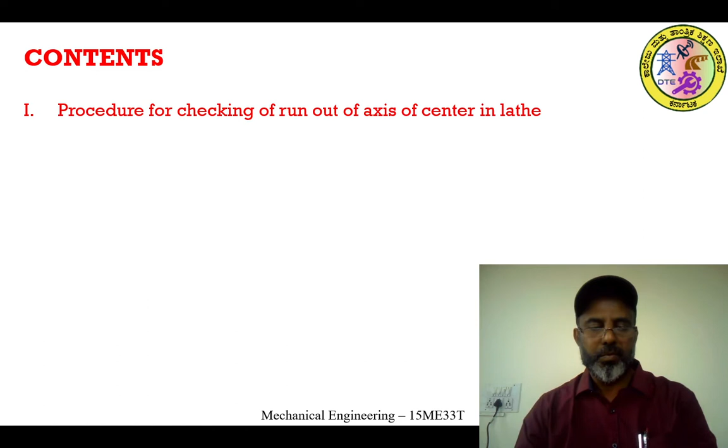This is the third test, in which we are checking the alignment of these two centers. Actually, one center is not there, but you can consider this chuck center as the center of the headstock, and the second center you can consider as this center fitted inside the tailstock.

So this is the test mandrel which you can see here, and the dial gauge indicator is fitted along with the dial gauge indicator stand. This is the magnetic stand fitted on the saddle or carriage. Initially pressure is given to this plunger, so we get the first reading, and we have adjusted the dial scale to 0.

So this 0 value is the initial value, and we will move the carriage towards the right side. While moving the carriage to the right side, this plunger will slide on the test mandrel. So the first reading we can consider as 0 because we have set the bigger pointer exactly on 0.

Next, I will rotate this wheel and move the carriage towards the right side. You can see the motion of the carriage towards the right side. Here you can take the reading. Simply check where the pointer is. It is on the second division from 0, rotated in the clockwise direction.

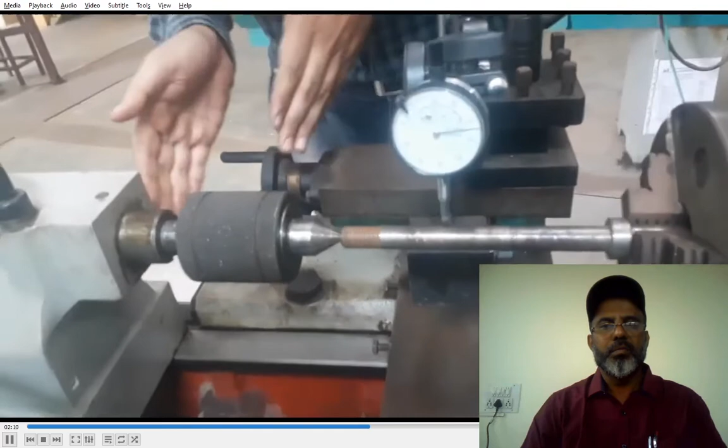Now again we will rotate this wheel and move the carriage towards the right side and take the third reading. In this case you can see again the pointer has rotated in the clockwise direction, and it is at the fourth line from 0. It indicates 4 into 0.01, means plus 0.04 mm. This is the third reading.

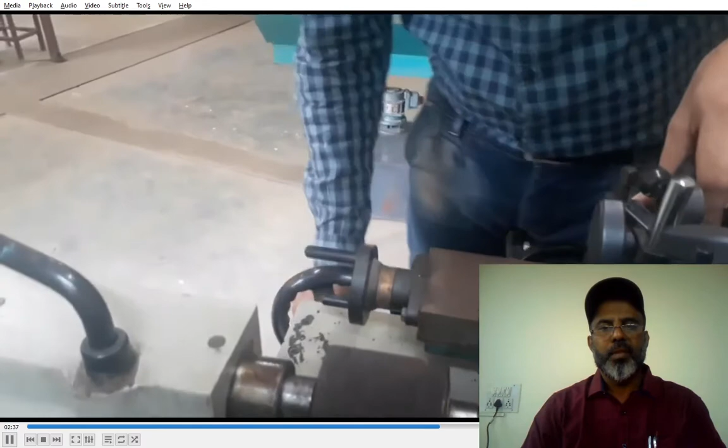Now again we rotate this wheel and the carriage moves towards the right side. Now we will take the fourth reading. Again the pointer has rotated in the clockwise direction, and it is at the 7th division from 0. So 7 into 0.01 means a reading of plus 0.07 mm.

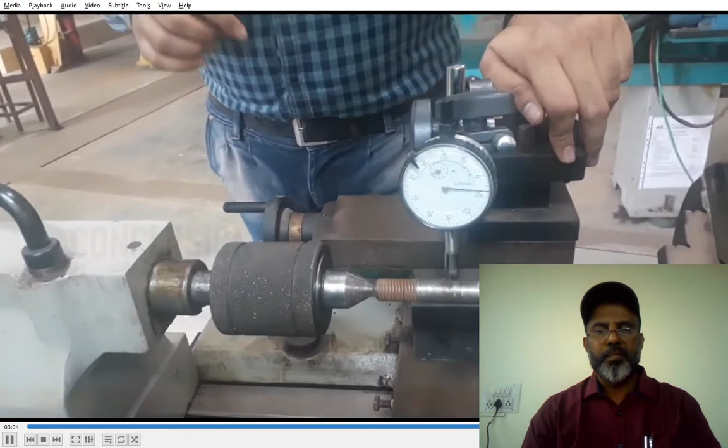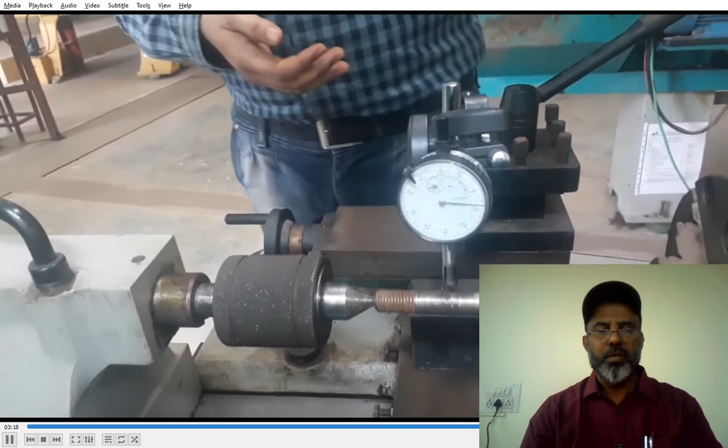From this reading what can we conclude? In the earlier two tests, we found that there is more variation, but in this case the variation is reduced as we have fitted the test mandrel within the headstock and tailstock. We have fixed the test mandrel within two centers, so there is less variation in the reading of the dial gauge.

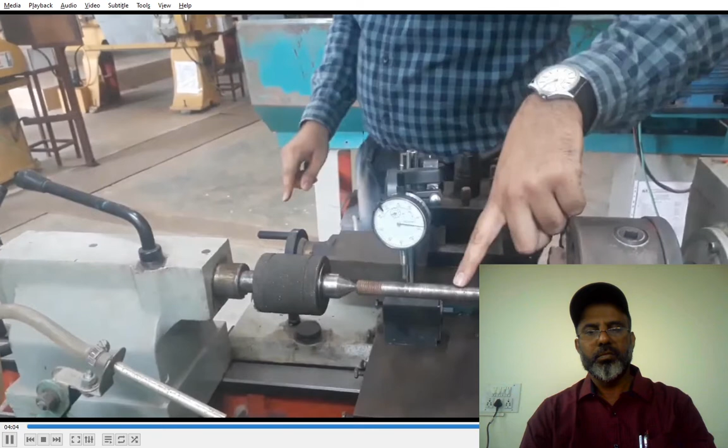Also, the readings from the first to the last are in the clockwise direction. So from this we can conclude that this portion is on the upper side and this portion is on the lower side. As the plunger is moving in the upward direction, we are getting the readings in a positive way.

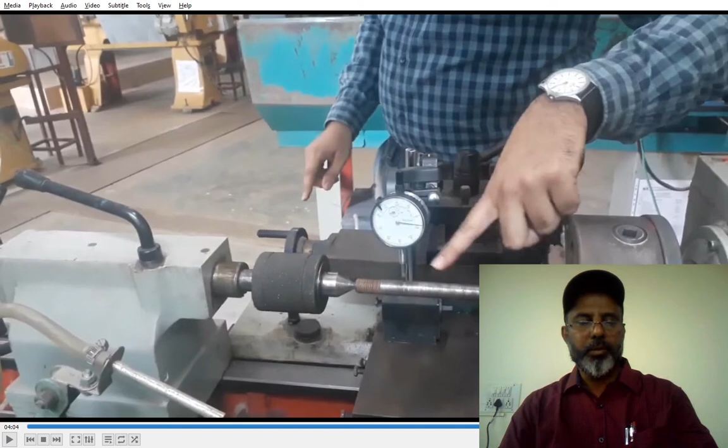Now coming to the topic, we have seen the video. Here the test mandrel is mounted either between the centers, or on one side it may be mounted on a chuck and the other side can have a center. The option is left to us. And the dial indicator with a magnetic stand is mounted on the carriage or the saddle.

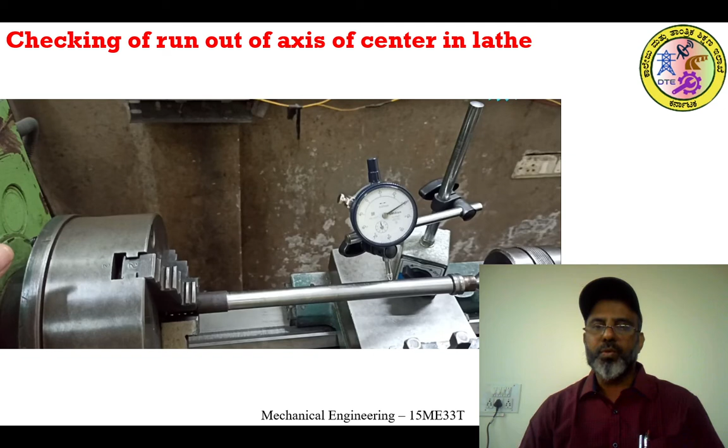Now let us know why we require the checking of run out of axis of center in a lathe, or the alignment between two centers, and how important they are. We know that when a cutting tool moves parallel to the lathe axis, we get straight turning. When there is a slight inclination to the axis, it will give a taper.

Here, when there is a shift in the axis of rotation of the workpiece at an angle to the lathe axis, and if you are going to feed the tool parallel to the axis, the workpiece turned out will have a tapered surface. Hence, this test should be conducted.

You should remember, the test is important because when we are going to run a workpiece on the lathe axis, if there is any shift of axis of rotation of the workpiece while feeding the tool parallel to the axis, it will generate taper on the workpiece surface. Hence, this test is conducted.

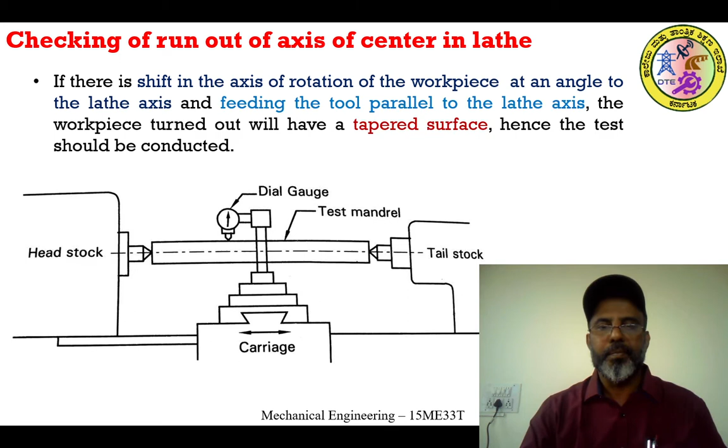And while conducting the test, this is a precision test mandrel. It is held either between the centers, or on the headstock there may be a chuck. In this schematic diagram, it is mounted between the two centers. Even if in the headstock we are having a chuck, this test mandrel can be mounted on one side in a chuck, on the other side with a center.

In this schematic diagram, the precision mandrel is held between the two centers. And this test mandrel is a rod of 300 mm long and 25 mm diameter. Remember that this test mandrel is generally employed for measurement of true running of the spindle. It has a 300 mm length and 25 mm diameter.

And this is the dial gauge. This dial gauge is having a magnetic stand, and this magnetic stand is kept on the saddle or on the carriage. This is the dial gauge. You can see here the picture of the dial gauge, how it is mounted on the carriage. This dial gauge is fitted to the carriage, and here this is the plunger. If you see in this photo, this is the plunger.

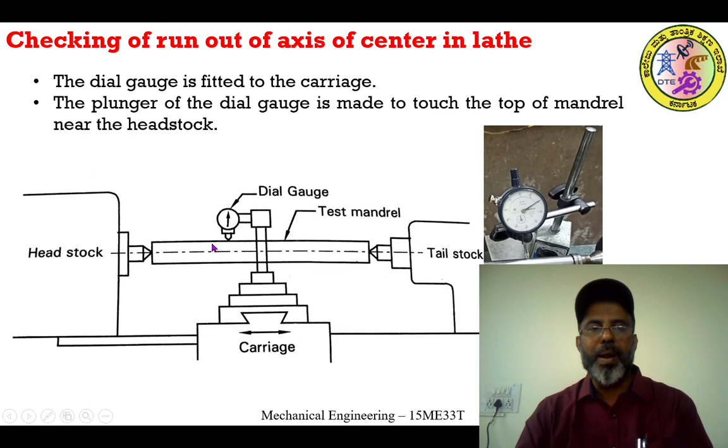This plunger of the dial gauge is made to touch the top of the mandrel initially near the headstock. Then at this point the reading of the dial gauge is noted. Then the carriage is moved towards the tailstock. Initially it is nearer to the headstock, then the carriage is moved towards the tailstock along the bed using the carriage hand wheel.

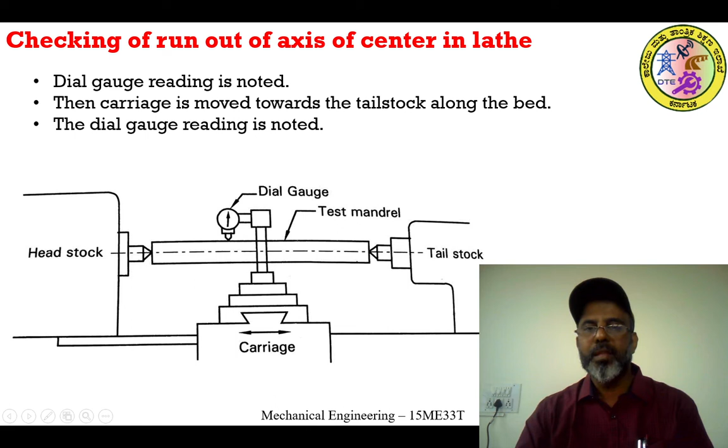Then when the dial indicator is moved towards the tailstock, once again the reading is taken over here and noted. For perfect alignment there will be no difference in reading. Between the reading taken near the headstock and the reading taken near the tailstock, for perfect alignment there is no difference.

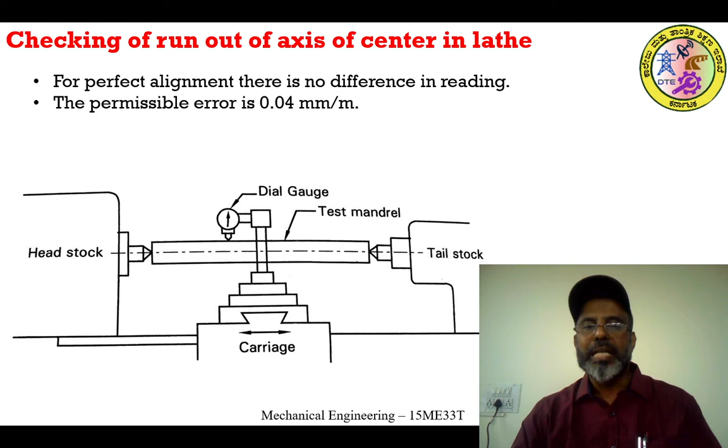Anyhow, the permissible error for checking of run out of axis of center in lathe, measured on the dial indicator, is around 0.04 mm per meter. You should remember the permissible error which is accepted is 0.04 mm per meter. This is the procedure of run out of axis of center in lathe, or the alignment between the two centers of a lathe.

Now once again, just refresh ourselves from the exam point of view. The question for 5 or 6 marks will be: explain with neat sketch checking of run out of axis of center in lathe. You should draw this schematic diagram showing headstock, tailstock, a test mandrel mounted between the two centers, and a dial gauge mounted on the carriage. This sketch carries 3 marks.

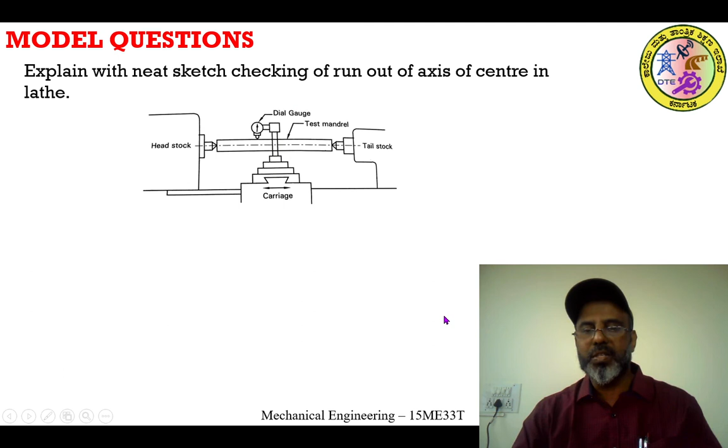Now for explanation, we should know why this test is carried out. When there is a shift in the axis of rotation of the workpiece at an angle to the lathe axis and feeding the tool parallel to the lathe axis, the workpiece turned out will have a tapered surface. Therefore, this test should be conducted. The procedure is that initially we mount a precision mandrel between the two centers, of size 300 mm length and 25 mm diameter. Now the dial gauge is fitted to the carriage using a magnetic stand.

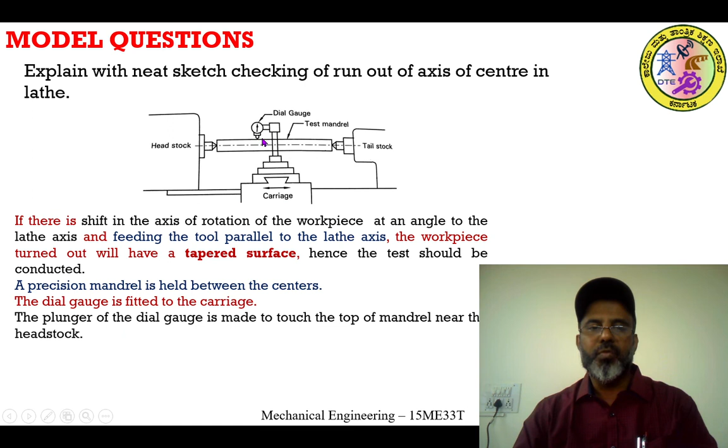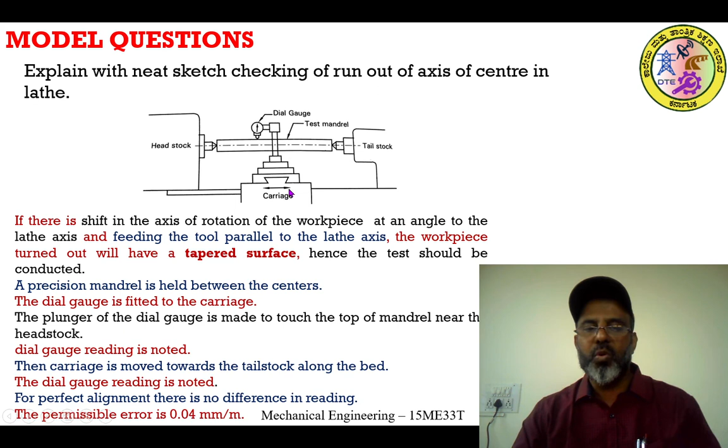Then the plunger of this dial gauge is made to touch the top of the mandrel near the headstock, and the dial gauge reading is noted at this point. Then the carriage is moved towards the tailstock along the bed using the carriage hand wheel, and once again the reading is noted. For perfect alignment, there will be no difference between the readings at these two positions. And the permissible error is 0.04 mm per meter.